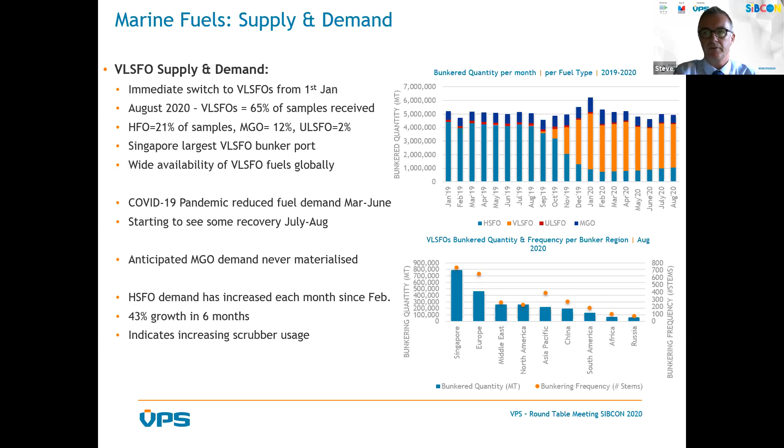In terms of sulfur compliance, VLSFOs have varied month on month throughout 2020. We saw a monthly decrease in the number of sulfur off specs from December 2019, where it was around about 6%, down to April 2020, where it was only 1% off spec sulfur. But since then, we've seen successive increases in May, June, and in August. Currently, we're seeing around about 3.7% of all samples tested exceed the 0.50% sulfur. Of these off specs, 0.8% are actually exceeding the 95% confidence limit of 0.53% sulfur.

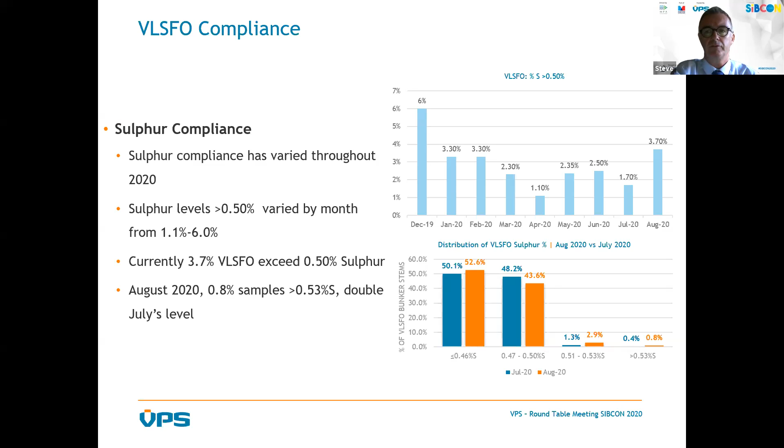In terms of flashpoint, 17 out of 37 bunker alerts issued by VPS this year have been for low flashpoint within fuels, and all fuel types have actually been affected to some degree. MGO has required 9 flashpoint bunker alerts, followed by VLSFOs with 5, and then HSFO with 3 bunker alerts.

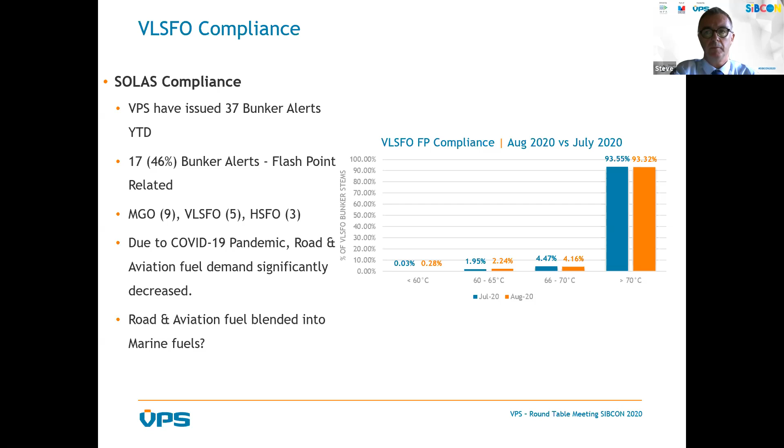Due to the COVID-19 pandemic, both road and aviation fuel demand has decreased significantly, leaving a surplus of these fuels at a relatively low cost. Therefore, we believe in certain cases these fuels have been blended into marine fuels, and being a more volatile material than marine fuels, this blending has had the impact of lowering the flash point of the marine fuels that we've dealt with.

In terms of viscosities, VLSFO viscosities have been wide-ranging since VLSFOs were first introduced to the market, and we're currently seeing a range of about 5 centistokes to just over 400 centistokes as the viscosity range. But 77% of these VLSFOs are actually less than 180 centistoke viscosity. It's very rare these days to see a 380 centistoke VLSFO, and currently only 4.7% of fuels tested have a viscosity which is greater than 280 centistokes. Viscosities have lowered over the year, probably due to lower or lighter materials being blended into the fuels.

If we look at densities, these have also varied greatly in their range since coming to the market, and we're currently seeing around about a range of 853 kilograms per meter cubed to just over 1,000 kilograms per meter cubed. Again, 60% of the samples tested lie between a range of 920 to 950 kilograms per meter cubed density, with only 2.8% being greater than 981 kilograms per meter cubed, still obviously below the 991 limit that we used to see for the HFO materials.

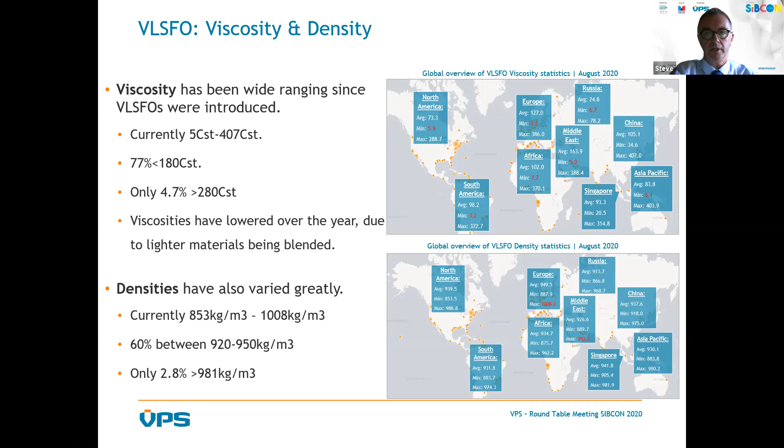In terms of cat fines, initially there was a concern, and obviously proof, that these were initially high in terms of what we'd seen previously. But these have improved significantly over the course of 2020. In January, 22% of the VLSFOs tested had a cat fine level which was greater than 40 ppm. However, as the year progressed, this has finally dropped down in August to a level of about 9% of the cat fines having a level greater than 40 ppm. The current range that we're seeing is probably from about 2 ppm to a maximum spike in August of just over 300 ppm. However, overall, the global cat fine average is currently 14.9 ppm.

We believe the improvement has been due to lower levels of residual components in VLSFO blends as the year has progressed.

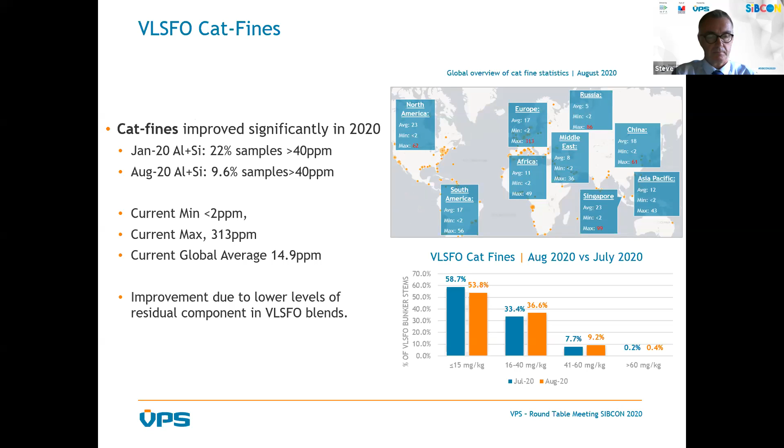If we move on to stability, VLSFO stability has certainly been the most concerning issue this year. In all bunkering regions, the average TSP has been on specification, yet we've seen many stability issues where within weeks of delivery, the fuel has become unstable. We believe that VLSFO currently has a shelf life of less than 3 months in comparison to HSFO.

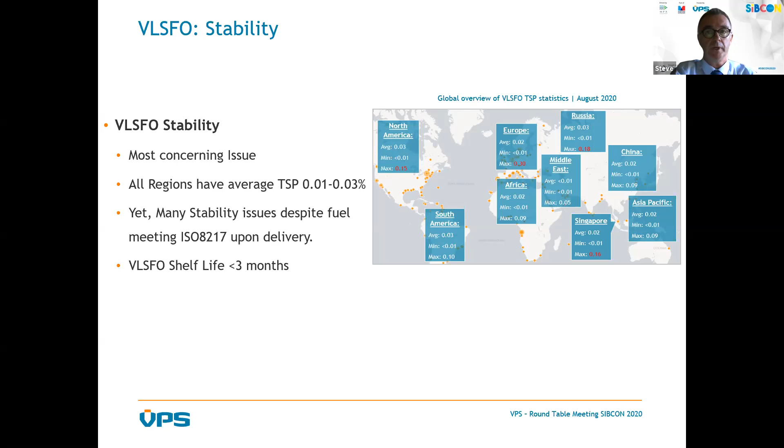HSFO has a shelf life of around 6 months, and MGO can be anywhere up to a year. In addition, we've seen cold flow properties as being a key concern operationally as well. Currently, 99% of the VLSFOs tested have a pour point less than 30 degrees centigrade, yet their wax appearance temperature, or cloud point, is currently on average about 24 degrees higher than the pour point. So this really can render the old advice of storing fuel at 10 degrees above pour point as irrelevant, as wax may have already begun precipitating at a higher temperature.

Currently, 78% of VLSFO's wax appearance temperatures are greater than 30 degrees centigrade. In addition, the wax disappearance temperature, i.e. the temperature required to make any precipitated wax go back into solution, is currently 10 degrees higher than the wax appearance temperature. And 77% of VLSFO's wax disappearance temperature is greater than 40 degrees centigrade.

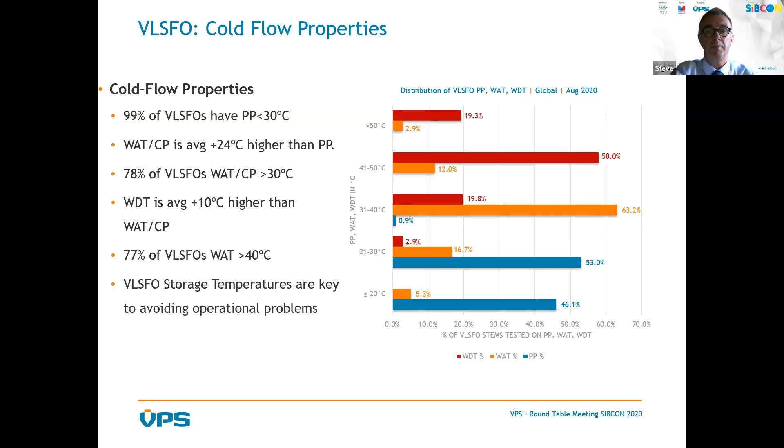So overall, VLSFO storage temperatures are key in avoiding operational problems. A VPS technical paper covering our proprietary wax appearance temperature test method was published back in October of last year, and it is available on request.

I'm now going to consider some cold flow scenarios. First of all, VLSFOs with a high TSP and high WAT. Heating these fuels in the storage tank whilst keeping the temperature above the wax appearance temperature, in order to prevent cold flow issues, can potentially cause TSP to rise and decrease fuel stability.

By the time the vessel starts to burn the fuel, the TSP could have become off spec and form a thick sludge. Typically, the fuel forms sludge at the purifiers, and increasing the temperature further, from the storage to the separation temperature, has generally worsened the situation. Therefore, the recommendation would be to limit VLSFO bunker storage time on board to about 2 months.

The next scenario is VLSFOs with low viscosity and high wax appearance temperature. The fuel's separation temperature may be lower than the wax appearance temperature, and for that reason, vessels cannot at any time really heat the fuel above the wax appearance temperature. This causes a problem with sludge formation in storage tanks and transfer pipelines, and can result in filter clogging with wax, together with a serious handling and transfer issue.

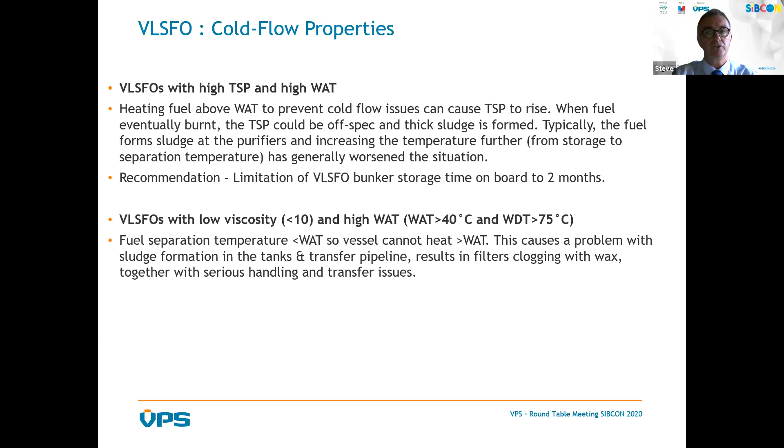The recommendation would be to use additives in a controlled manner. In certain cases, these can improve the situation enough to actually burn the remaining fuel.

And then finally, where VLSFOs have a wax disappearance temperature greater than 75 degrees centigrade, we suggest carrying out the exact flash point test in order to make sure that the fuel is not being heated above the flash point.

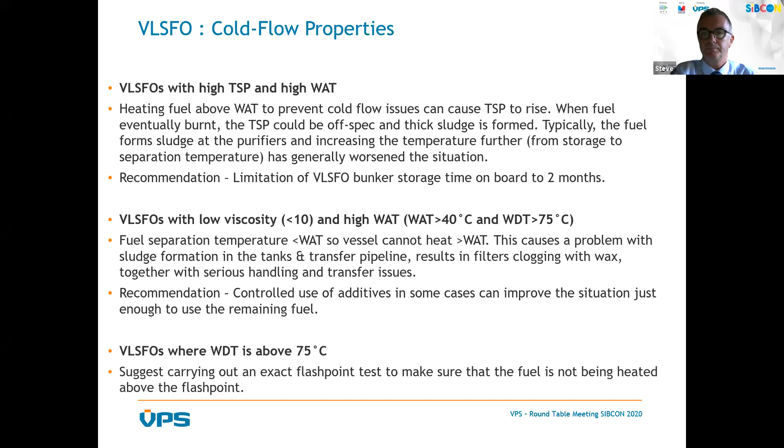In terms of off specs, VLSFO off specs relevant to the ISO 8217 spec limits show that currently 7% of VLSFOs exceed at least one test parameter specification, with sulfur probably accounting for almost half of the VLSFO off specs. In terms of region, Europe currently has the highest level of off spec VLSFOs, at 17% of VLSFOs exceeding at least one test parameter specification.

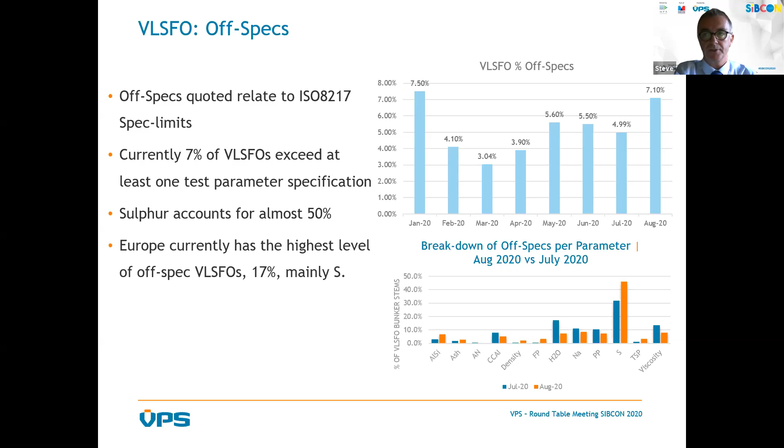Here, the off spec parameter is mainly sulfur. By comparison, Singapore currently has a VLSFO off spec rate of 4.2%. But in this case, the parameter of concern is mainly flash point.

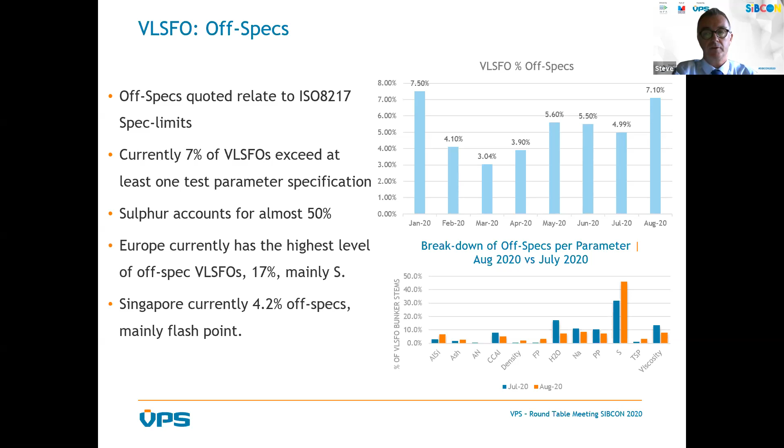During the first quarter of this year, VPS witnessed over 40 vessels suffering with broken piston rings, damaged cylinder liners, and hard deposits on piston crowns. This warranted a full investigation by VPS, and we published our findings and conclusions in a technical white paper in May of this year. Of the 40 cases, all the vessels burned on-spec VLSFOs, and all used a base number 40 lubricating oil.

We found that two-stroke engines were most susceptible to this issue. Yet there were numerous fuel and lubricant suppliers and various engine manufacturers involved, so there was no one specific repetitive cause in terms of the supplier or the engine manufacturer. The actual cause was a high reserve base number of cylinder lube oil not being fully utilized to neutralize the acidic component of the fuel during combustion, due to the lower sulfur levels within the fuel.

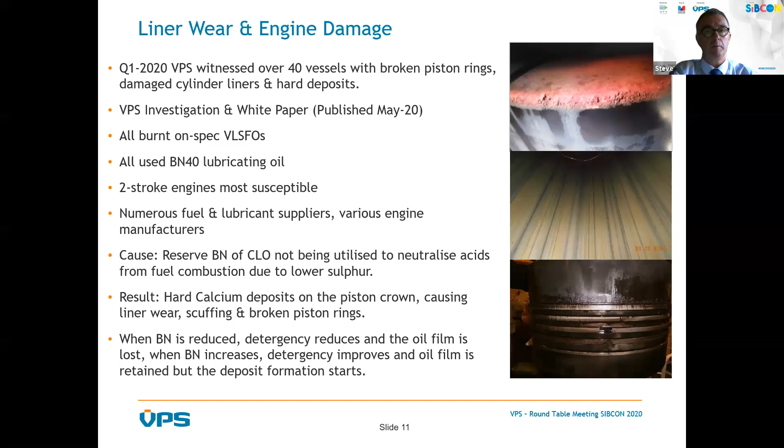This resulted in hard calcium deposits appearing on the piston crown, causing liner wear, scuffing, and broken piston rings. It's worth noting that when base number is reduced, the detergency effect of the lube oil reduces and the oil film is lost. However, when base number increases, detergency improves and the oil film is retained. Calcium deposit formation can still begin, but the acidic presence from the fuel is reduced due to sulfur reduction. The white paper we produced on this investigation is available upon request from VPS.

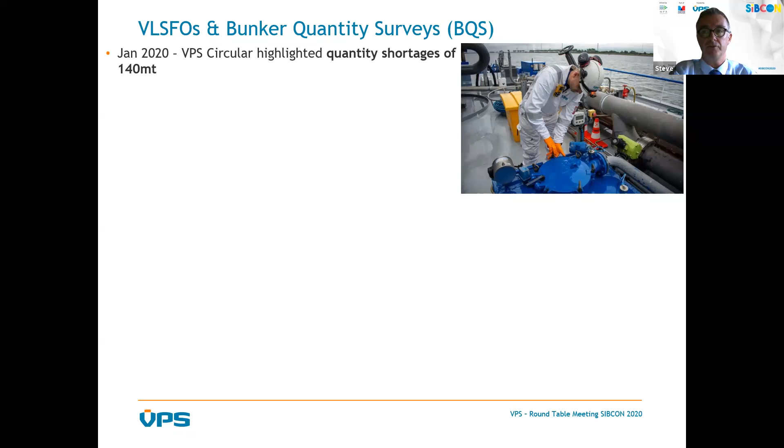Moving on to BQS of VLSFOs, in January of this year we recognized that some bunker quantity surveys relating to VLSFO delivery encountered large quantity shortages in excess of about 140 metric tons. The contributing factors varied, and some of the observations during the survey included VLSFO bunkers not stabilizing in the sounding pipes, leading to inaccurate measurements, as well as prevailing low ambient temperatures causing waxy conditions of the VLSFO and poor flow of the fuel.

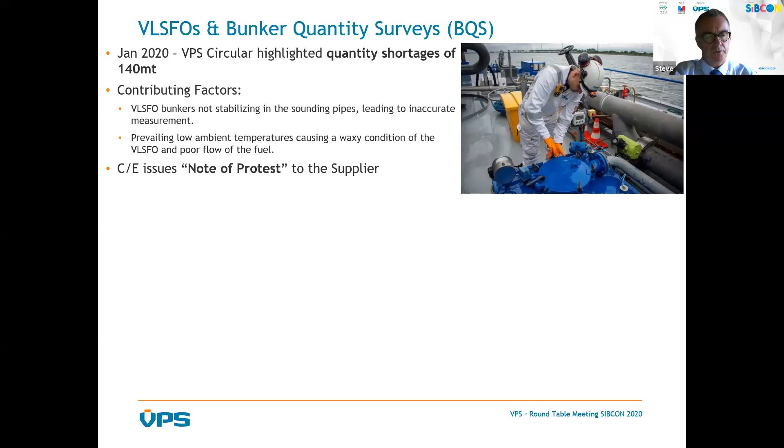In such cases, the vessel's chief engineer would normally issue a note of protest to the supplier's representative for the alleged quantity difference. However, it's also worth noting the importance of engaging a bunker surveyor service in order for the parties concerned to really assess and understand the following.

This would include the precautions needed during the bunker survey to detect these losses and where these losses may have occurred, an independent assessment of the situation, and giving notification of the issues on site in real time.

It also includes identifying the final quantity difference encountered and the possible reasons for these quantity differences, documenting the action that will need to be taken, and if possible, providing photographic evidence in support of the findings. It's also about ensuring we follow up at the next port and finally giving an assessment of the completed investigation and a conclusion as to why this quantity difference occurred.

The closure of the issue by the surveyor will certainly benefit the buyer, the chief engineer, and also the seller.

Following the correct procedure to obtain a representative sample is crucial, especially for VLSFOs, where sulfur content is now being closely watched by port state control. Improper sampling leads to inaccurate test results and information, which in turn leads to a potential dispute situation where more samples will need to be tested.

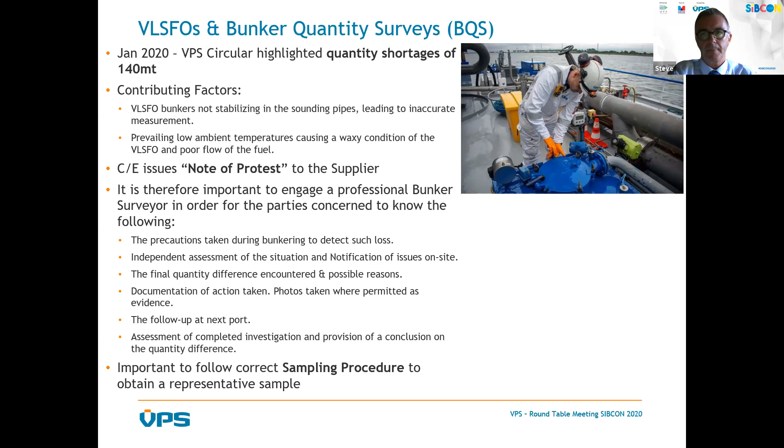In summary, VLSFOs are currently the most popular bunker fuel of choice, accounting for 65% of all samples received by VPS. These fuels are widely available around the world. We have witnessed, in terms of marine fuels, since the end of February, a 43% increase in demand for HSFO, indicating an increased usage of scrubbers. Yet the anticipated demand for MGO hasn't materialized, certainly not as yet.

VLSFO sulfur global compliance has varied month on month from 6% down to 1% off specs. Currently the off-spec sulfurs run at a rate of about 3.7% for all VLSFOs tested, exceeding the 0.50% sulfur limit. The COVID-19 impact and low demand for road and aviation fuels has seen these fuels potentially blended into many marine fuels, resulting in a number of flashpoint issues.

VLSFO densities and viscosities continue to be variable in their ranges, but as the years progressed they've trended at a lower level, certainly lower than the 991 density and 380 centistoke viscosities we previously saw with HFO fuels.

VLSFO stability and cold flow issues are probably the most common concern for vessel operations, where on-spec VLSFOs can be quickly destabilized on board a ship within weeks of delivery. So the storage and transfer temperatures require very close monitoring, in terms of pour point, wax appearance temperature, wax disappearance temperature, TSP, and viscosity.

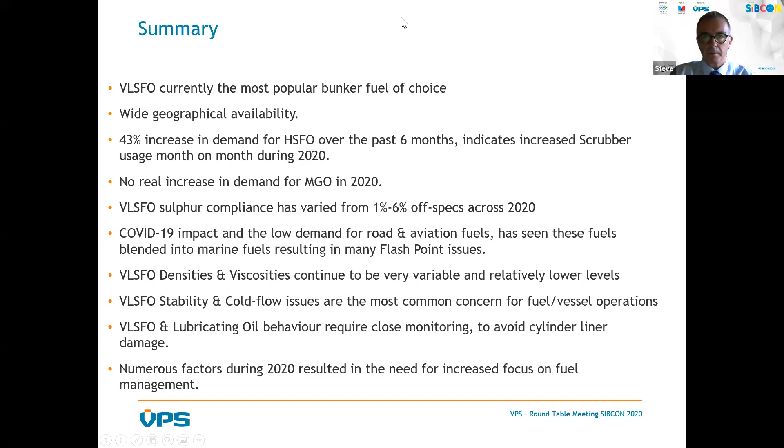Thank you, Steve. Thanks for that, packed a lot of information. We've got a number of questions, but we will hold on to that. Floor is all yours, Paul. In this case, unfortunately, a Zoom floor, but all yours.

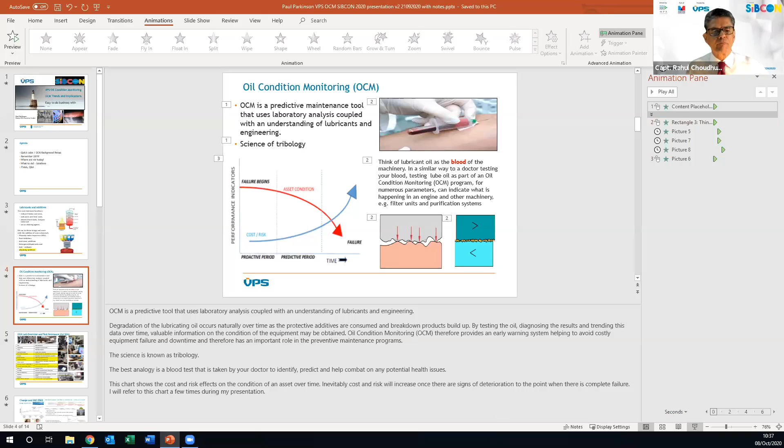Sorry, I've just got a message to say we can't see the slides. Yeah, sorry about that, ladies and gentlemen. That's correct, Paul, so you may need to backtrack a little bit. Okay. Let me just check in with you then, first of all, Rahul. Yes, that is correct, yes, very much on now. So can you see the slide that says OCM is a predictive maintenance tool? Yes, yes, I can, go ahead, Paul. All right, okay, so carry on.

So yeah, OCM is a predictive tool that uses laboratory analysis coupled with an understanding of lubricants and engineering. The degradation of the lubricating oil occurs naturally over time as the protective additives that I spoke about are consumed and break down products build up. By testing the oil and diagnosing the results and trending this data over time, valuable information on the condition of the equipment can be obtained. Oil condition monitoring therefore provides an early warning system that helps avoid costly equipment failure and downtime, and therefore has an important role in preventative maintenance programs.

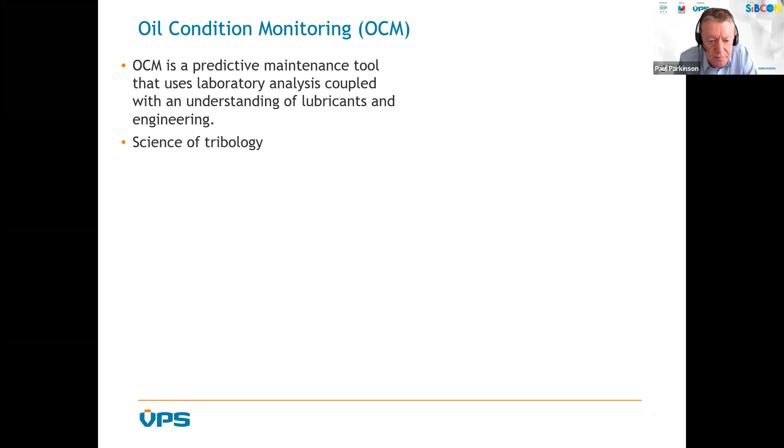The science is known as tribology. The best analogy to explain this is the blood test, which is taken by your doctor to identify, predict, and help combat any potential health issues. Now, this chart is an important chart - I'll refer to this a few times through the talk - but this shows the cost and the risk effects on the condition of an asset, whatever that asset may be, over time.

Inevitably, cost and risk will increase once there are signs of deterioration to the point where there is complete failure.

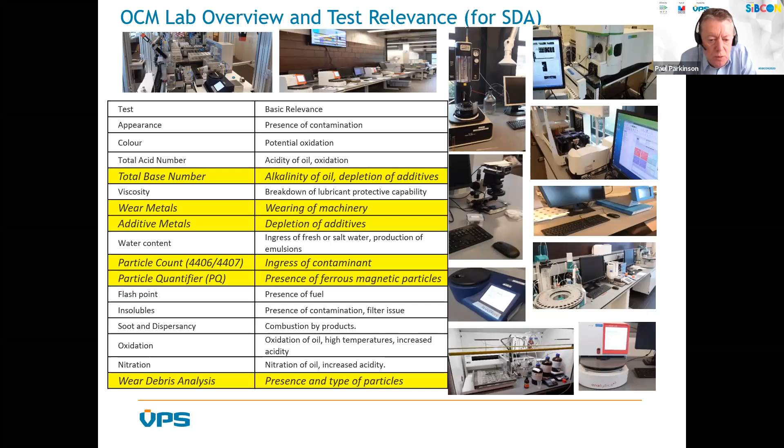For example, the color of the oil can indicate a level of oxidation, and a positive flash can indicate the presence of fuel in the system. The highlighted parameters shown in the table are those particularly important with the situation we're talking about with cylinder oils.

Steve and I presented to almost 1,000 people through 10 IMO 2020 seminars and roundtable meetings in 8 countries last year. You might remember some of these slides if you attended one of these talks.

But whatever your solution was, it will have an effect on the lubricant, and this is where OCM is effective. Lubricant can be an aid to help identify potential problems and areas to improve, and help formulate a solution. OCM can be the mechanism to help with this challenge of change.

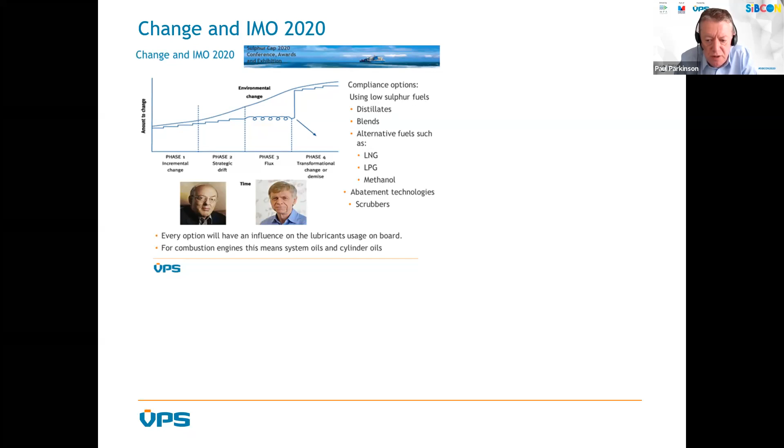Back then, I focused on cylinder oils and the role of base number additives to combat acidity. Financially, in a procurement sense, this is very important. ExxonMobil, for example, say that cylinder oil equates to 65% of the lubricating budget on board ship.

Base number is a test to show the oil's ability to neutralize acids that are formed. Typically, the higher the base number, the more acid it will be able to neutralize.

During the combustion cycle, sulfur in the fuel is released, forming sulfur dioxide, and some of this goes on to form sulfur trioxide. Water contained within the scavenging air and from the combustion process reacts, and it forms sulfuric acid.

As oil is used in service, it becomes contaminated with these acids and causes the base number to drop over time. The rate of the drop is determined by the amount of acids introduced to the system. So by using oil analysis, you'll be able to track the base number of your oil and determine how much life is remaining.

Last year I proposed 2 possible scenarios. As we know, most 2-stroke engines are designed for operation on high sulfur fuel, so this scenario fits for the users of scrubber technology.

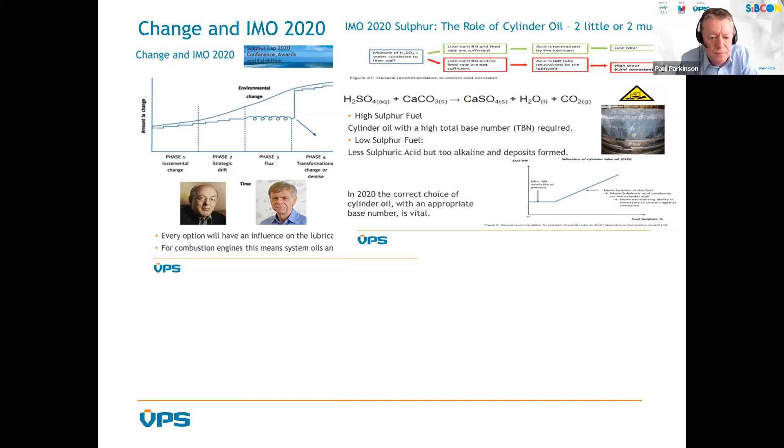So if you mix all this up, what we talked about last year, the industry was greatly uncertain and very apprehensive about the future.

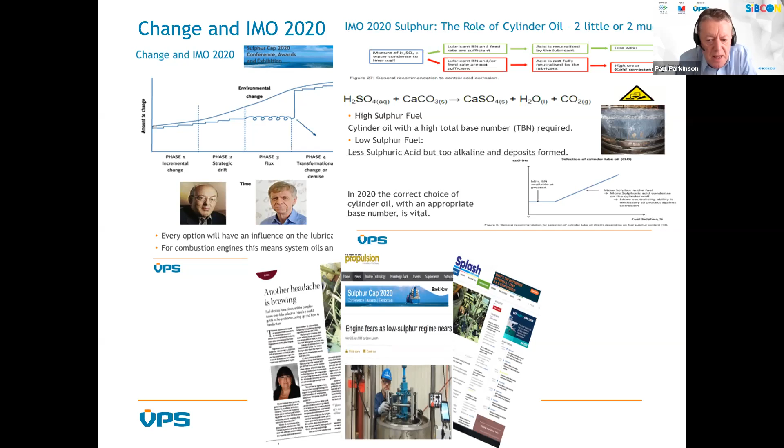And fueling this uncertainty was cost and risk. Now, if you remember that chart earlier that I showed in an earlier slide. Last year I also spoke about the Swedish Club, which you'll probably know about already. They have a very important part to play in the industry as an independent insurer and provider of insightful information. You can see by their 2018 main engine damage report that the cost of a cylinder damage alone is over $500,000 US.

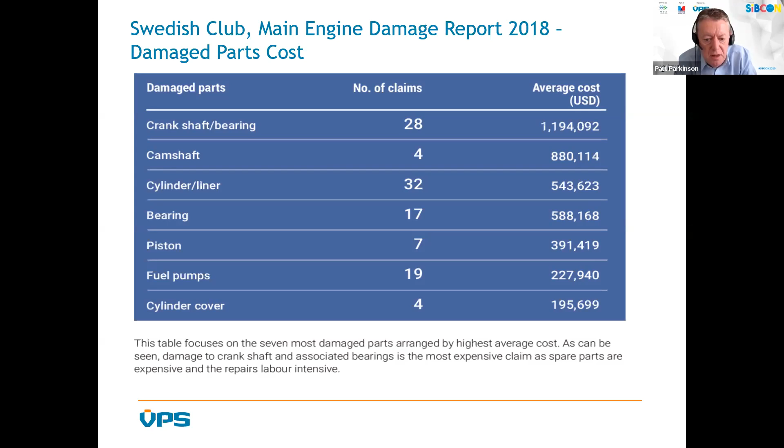Now, I wonder whether those numbers of claims and the average cost has changed during this year. So this, coupled with the cost of cylinder oil that I mentioned earlier on a vessel, tells us that this is a financial problem that we need to solve. So, how close were we with the predictions of last year and those harbingers of doom?

So let's look at the position in 2019 before the change. What this chart shows is the number of samples that were regarded as green, amber, and red that were tested by VPS OCM. You can see that over 50% of all of our oil samples were fine, 34% had an amber warning, and 11% were considered critical. Where possible, VPS use OEM limits as our guide.

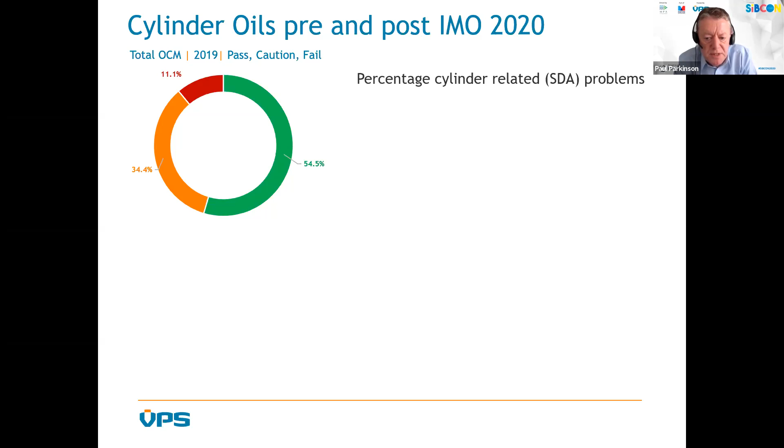So let's look at the percentage of those samples that were cylinder related. 13.2% of the ambers were cylinder related, and 14% of those red samples were cylinder related, and 6.1% overall of the reds and ambers were related to cylinder issues. So that was pre-IMO 2020.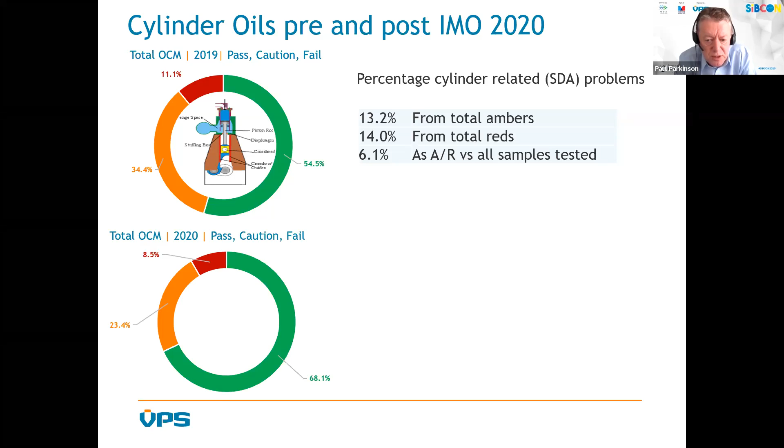However, the picture is very different in terms of cylinder related issues. There were nearly 3 times more ambers and reds, and twice overall of all cylinder connected issues—twice the number of ambers and reds of cylinder-related issues. So I'm sure that the Swedish Club report will reflect this for 2020.

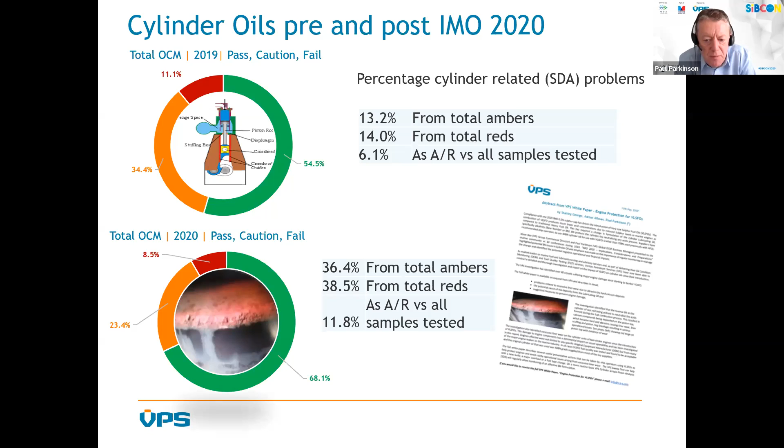Steve has already spoken in his presentation about VPS being a technically orientated organization, and we actually attend panels on oil, fuel, and OEM. We investigated this significant rise in detail, and we broadcasted a white paper to the industry explaining our findings. If you didn't receive the white paper, please contact your VPS account manager for more information so this can be provided.

So here are some of the findings from that white paper through the lens of 2 key tests on cylinder oil scrape down analysis, which I'll talk a little bit about later. The 2 tests are iron content and base number. I'll just pause for a moment while you can look at that table.

There's a lot of information on there, and it describes before the incident, during the incident, and after the incident. What you can see is that before the incident, the iron content in all of the 5 cylinders appeared to be satisfactory, and so the cylinder scrape down oil appeared to be satisfactory and within limits.

Now, when we start the incident, you see that the iron content in all of the 5 units appears to be elevated. Considering that the cylinder oil in use is a 40 BN and the fuel sulfur of approximately 0.4, the base number in the scrape down oil appears to be close to or marginally above the new oil value.

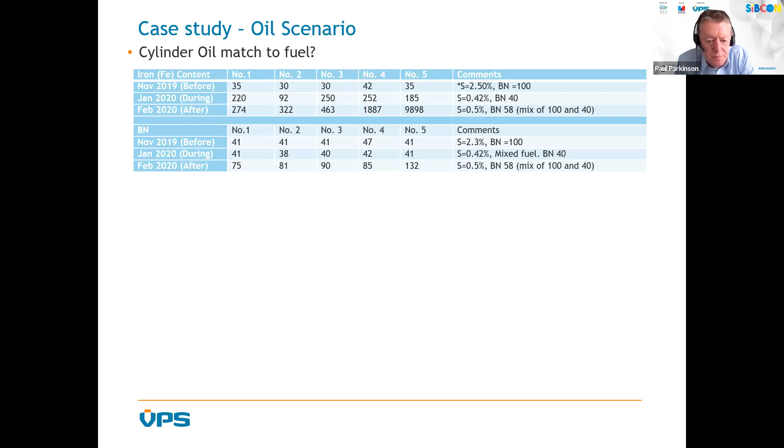One of the common features noted in this type of damage was the presence of deposits arising on the surface of pistons, and Steve mentioned this in his presentation as well. The deposit was concentrated on the piston head and in areas around the piston crown. They were hard in nature, and they were either white, grey, or reddish coloured.

The samples of these deposits were also analysed for elemental composition. So you can see a breakdown there. This table clearly shows that the piston deposits were mainly formed of calcium. Our white paper proposed that this originated from the reserve alkalinity in the cylinder oil, with a much smaller amount of vanadium arising from the fuel oil. Further to that, you can see an increase in iron content, and this indicates abnormal wear of that cylinder unit and the piston rings.

Alkaline deposits building up on the piston crown can damage the oil film between the piston ring and the liner, and this can lead to scuffing and seizures. Deposits that form between the piston rings and the pistons prevent free movement of the piston rings and increase liner wear.

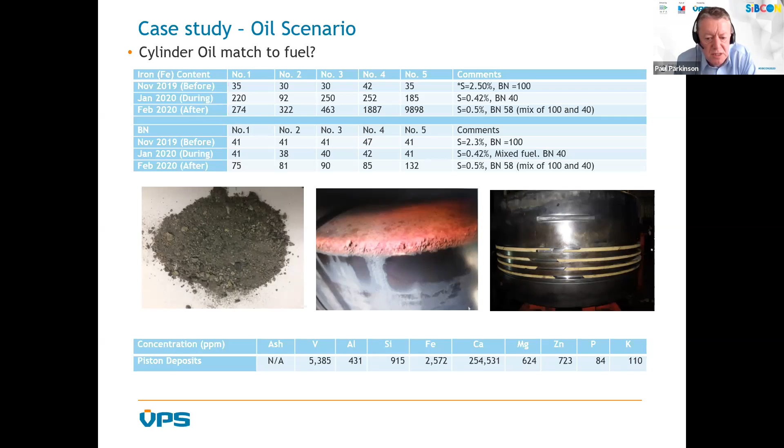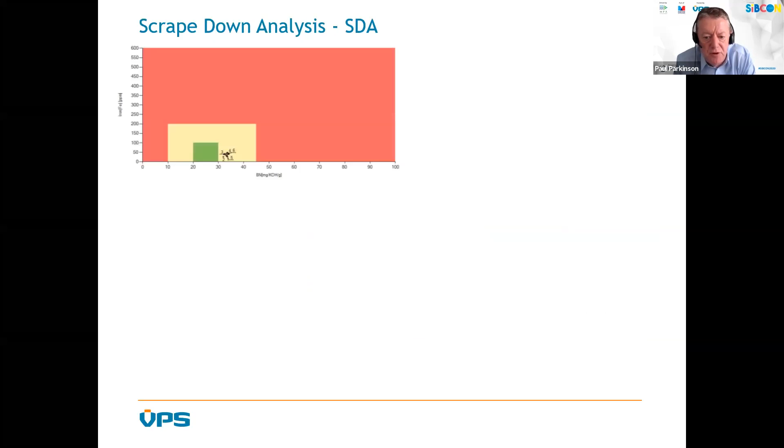So let's talk in a little bit more detail about scrape down analysis. This is a key element of our OCM service for cylinder performance and health. What you can see here is an example of our detailed scrape down report.

The box at the top allows you to quickly see the effect of combining iron and base number. The green box, against the traffic light system, indicates the area of safety and good practice. It also shows the effect of a higher or lower base number with respect to wear and the increase of iron. Each of the cylinders are plotted to assess their condition for each of these two parameters.

You can see some marks just to the right of the green box there, and they're each of the cylinders. Our reports also categorize oil condition monitoring aspects of every cylinder, and these are shown graphically, and also shown by commentary as well.

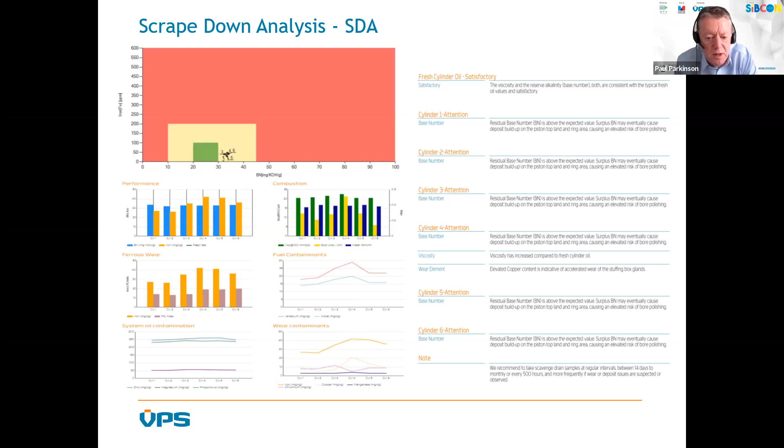So in this case, pretty much like the case study that I talked about before, there's a surplus of base number, which will probably cause deposits and damaging wear of the cylinder liner, as was shown on the previous slides.

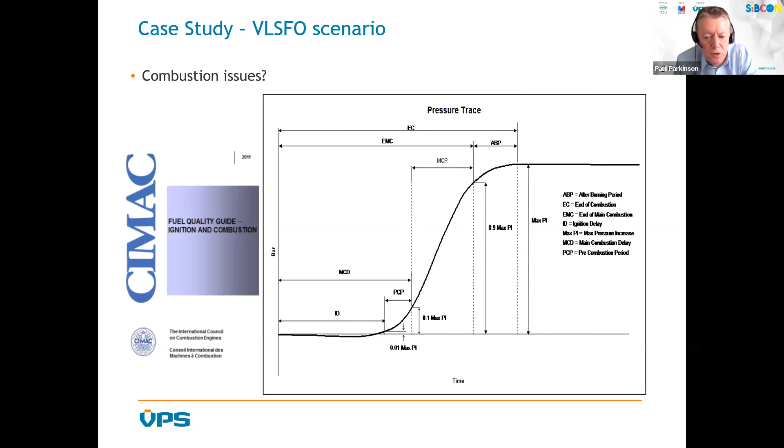Now, Stephen's presentation talked about fuel quality, and we've also discovered through conversations with our customers and the industry that scuffing might not just be due to this deposit formation. Steve spoke about fuel quality issues in his presentation, and some of our customers have also highlighted combustion issues that are showing a delay in ignition. CIMAC have again provided plenty of information on this subject through their fuel quality guide on ignition and combustion.

So, what do we do? I'm stating the obvious here, but we want you to select the correct base number cylinder oil.

Now, if you're changing supplier, VPS can help you with this transition to make it as efficient as possible, and we can help you minimize costs through our in-house compatibility methods. We can investigate the effect of different ratio mixes and aging on properties of these mixtures.

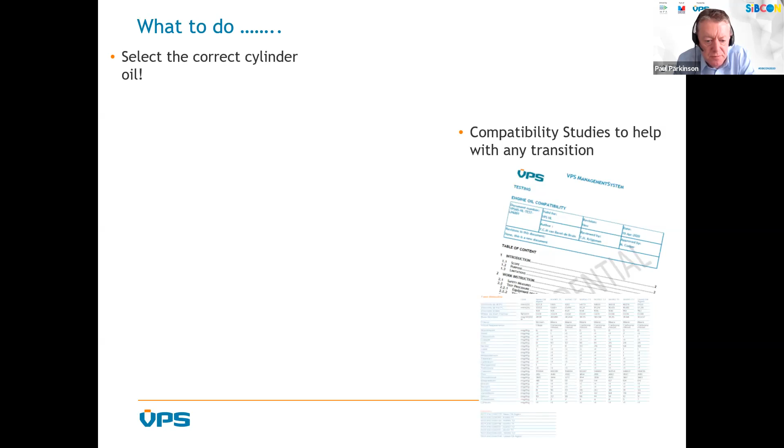As I've mentioned in previous slides, regular scrape down analysis is a great tool to identify cylinder condition, but sometimes it might be too late for the vessels to react by the time they get the analysis results from the lab.

Although it's not a substitute for sending samples to the laboratory, procuring an onboard kit for measuring iron and base number is useful. As soon as any changes are made to the cylinder lubrication, the vessel should take a sample from each of these units and analyze it so that immediate action can be taken. Following which the same subsamples can be sent to the lab for a detailed scrape down analysis.

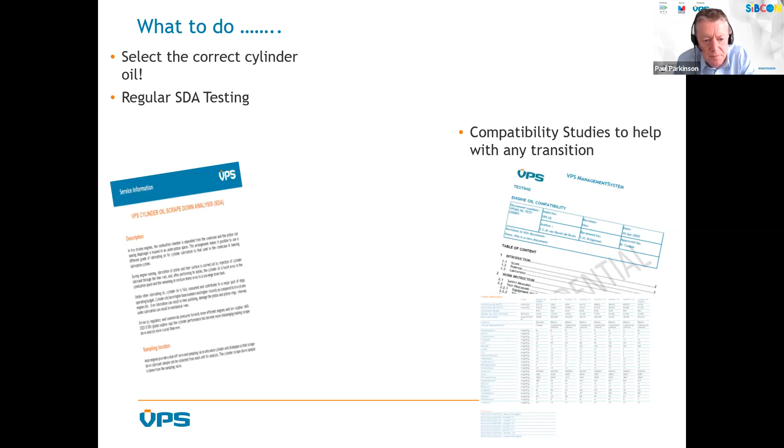The feed rate shouldn't be altered without considering a range of parameters, but mainly base number and ferrous content in the cylinder scrape down oil. The optimum feed rate can normally be identified by carrying out what's called a sweep test.

The sweep test is useful when you're changing oil or fuel and running in a new engine, or renewing your liners, and you need to verify and readjust your feed rate if you need to. This will optimize the cylinder condition and the oil consumption.

For the sweep test, a sample is taken from each cylinder from day 1 to day 6, and they should be labeled with all of the required information. It's also recommended to refer to your engine maker's guidelines when conducting the sweep test.

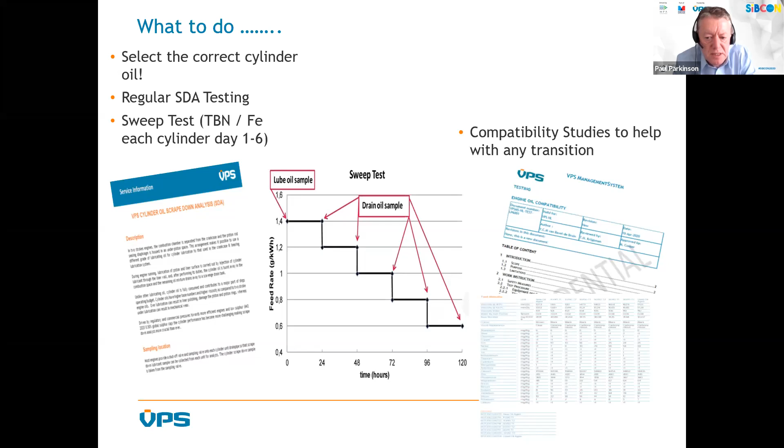Before the sweep test, the cylinder condition and the wear must be thoroughly assessed through an initial inspection, and preferably this test should be performed with a calm sea and under stable engine operations.

As well as the samples for the sweep test, we would require the fuel that's in use. We could be actually testing that sample already, so you could just give us the sample number. We need to have the system oil that's in use and any unused cylinder oil for comparison.

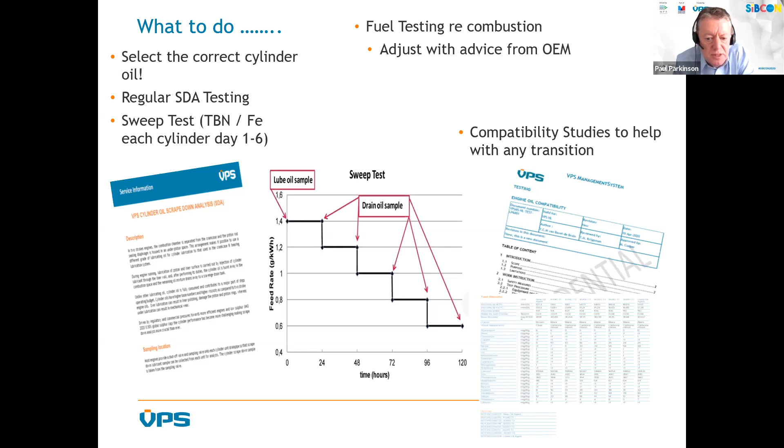As has been mentioned, the scuffing could be as a consequence of the fuel. So please again, use your analytical test partner to test the fuel for its ignition and combustion properties.

Finally, I would just state the obvious again: closely monitor your engine operations, especially during any changeover, listening and looking for any knocking sounds, and notice and record any load unbalance or any unusually high exhaust temperature deviations.

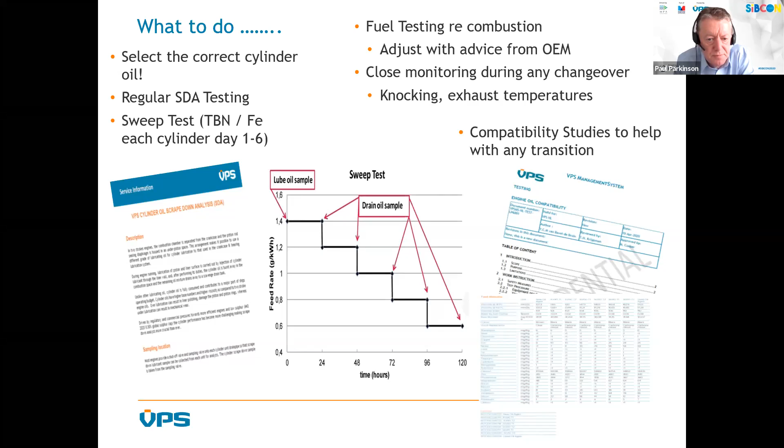So final slide now, and I just conclude my presentation by highlighting the importance of the following aspects of our VPS OCM service for you to consider and for you to compare with maybe other suppliers that you have.

I've made the point, hopefully through the presentation, of the relationship between fuel changes and oil, and so I suggest that you use a provider that can provide both services and allow a complete and holistic assessment of your vessel.

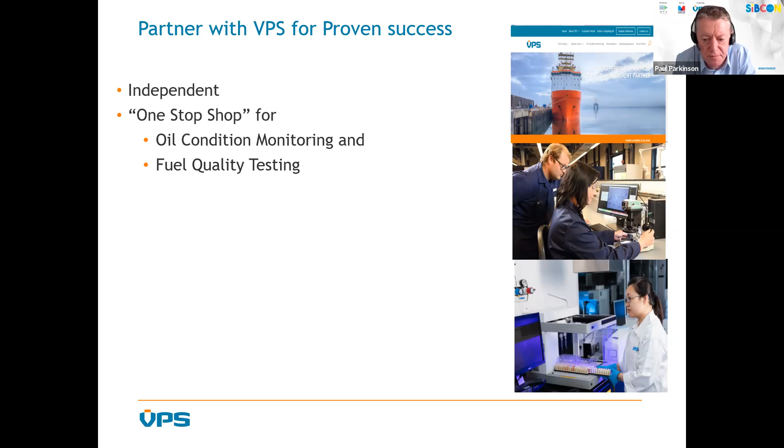VPS are recognized as the market leader and an innovator in the industry, and I think this is important, remembering back to the business chart about strategic drift before. It's particularly important in an industry that's changing.

For us, examples of innovation are our abilities in change management, particularly through our compatibility testing, and also our advanced robotics laboratory and IT reporting and delivery systems.

And then finally, even with all of the sophisticated technology we have, it's very important the working relationship you have with your suppliers. And we can deliver this through our global network and our local account management structure.

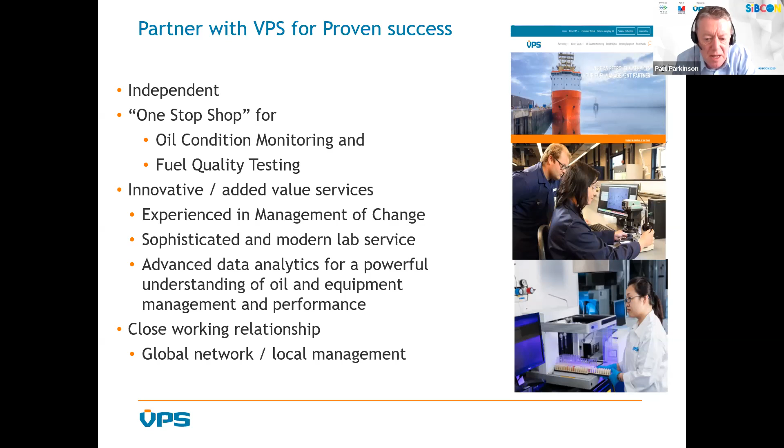Thank you. Back to you, Raul.